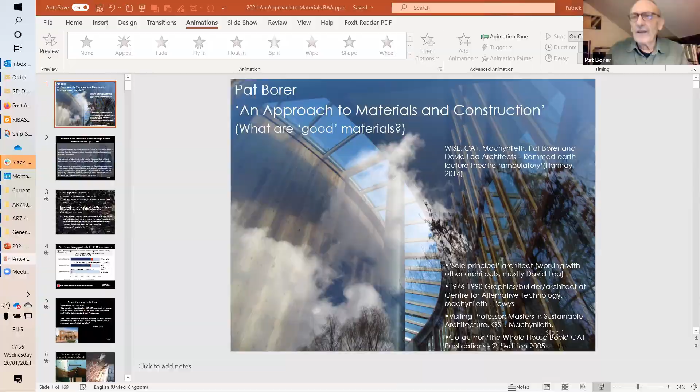Anyway, I will share my screen, which looks like that. Then I go F5 and hopefully - no, it doesn't work. Okay, right. Come on, yeah, there we go. I'm just going to get rid of all the zoomy stuff which gets in the way. You are screen sharing, I know. Yep, I am, I can see it clearly. How do you get rid of that? Anyway, okay, so...

Matt, the flyer said all materials are bad - I feel it's more a Matt phrase than a Pat phrase. So I've politely called it an approach to materials and construction.

Now what we like to do as architects is something like this - that is loads of light, space, commodity, lovely materials that we like the look of and the smell of sometimes. This is what we love doing. Now, interestingly, since this opened 10 years ago, I've done none of it.

And that's partly because nobody's asked me. Oddly, nobody wanted a rammed earth university. I thought they would pile in, but no. But the reason partly is...

Since then I've been working on this side of things really. And this learned paper from Nature, as you can scan around that, shows that our human-made mass is now bigger than the overall living biomass. So it brings you to the question of, well, two things perhaps.

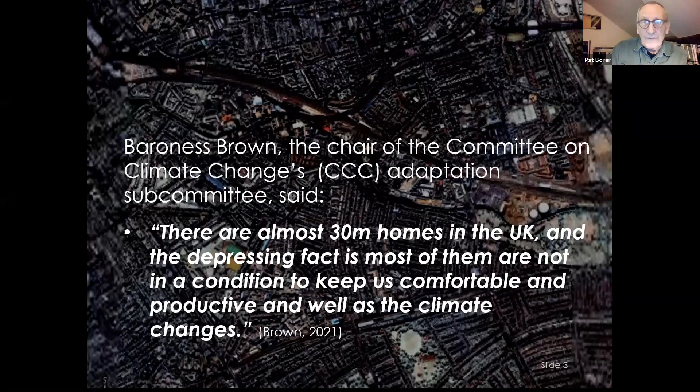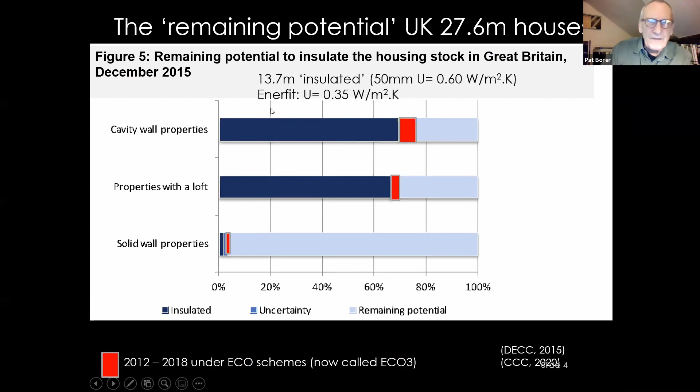So on that theme, the marvelous Baroness Brown, who I must come up and talk to, part of the Committee on Climate Change, says this: most of our houses are terrible. If you look at what we think remains to be insulated, the standards to which they think they're insulated are really poor. The definition of insulated cavity walls is about U value 0.6, and the Passive House ENERPHIT standard is 0.35, which seems more reasonable. So there's all that to do, same with roofs, same with solid walls, really.

So there's a heck of a lot to do. Not only that, the new buildings we've done, housing and non-domestic, I would say are pretty substandard. They need upgrading, as Baroness Brown says. I love this - Help to Buy should only be available if the homes are really high quality, because they're not.

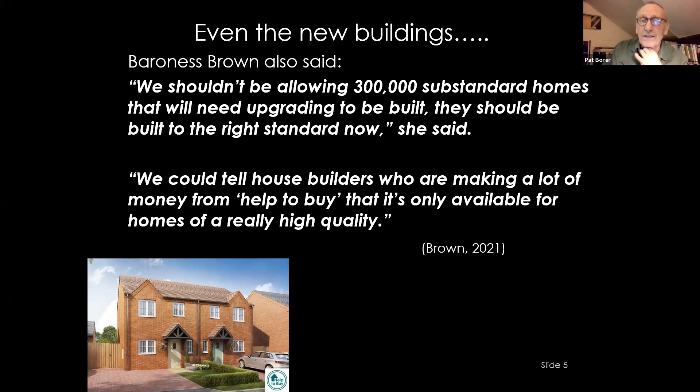So one of my hobbies is to break onto building sites and photograph terrible things that go on. These are local buildings to me - you don't need much breaking in because it's in the country. But you can see here, incredible material like Dow Chemicals Wallmate with nice tongue and groove on it, and they don't know what to do on the corners.

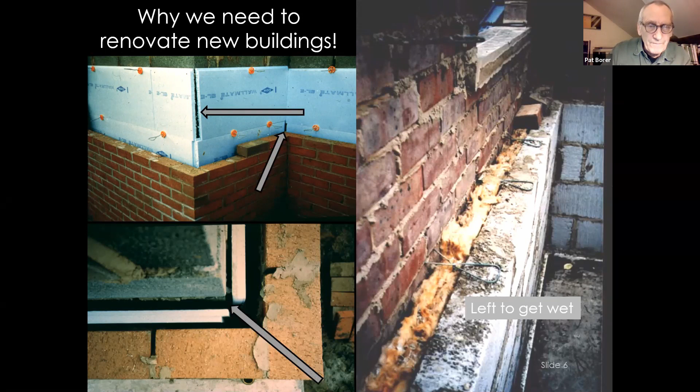This one is just down the road from me, Executive Housing, and it's appalling. Partial cavity fill, extreme thermal bypass, as it's called in Passive House circles - so you may as well not have bothered. Not only that, it's actually dangerous because water can be tracked across the cavity into the building. That's partly the materials, partly really poor specification and really poor site control.

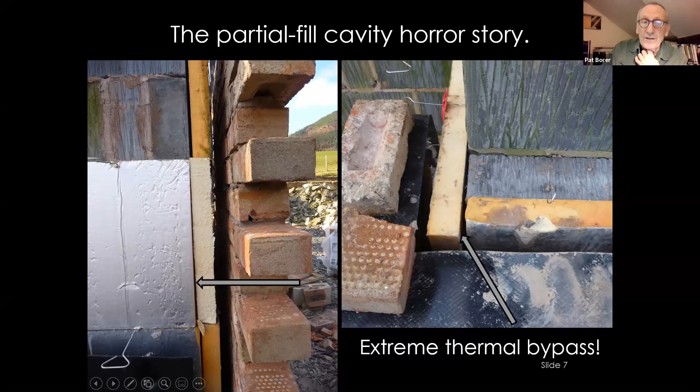It's really bad - lots of poor workmanship, poor specification. One of these is one of my sites, the one on the left. This is the second time they did it. I got them to take it down a third time and do it properly.

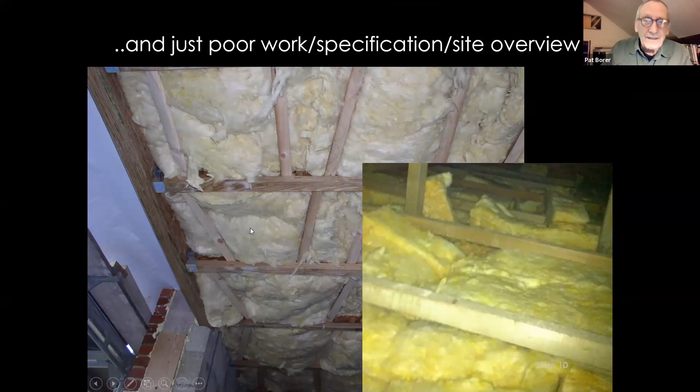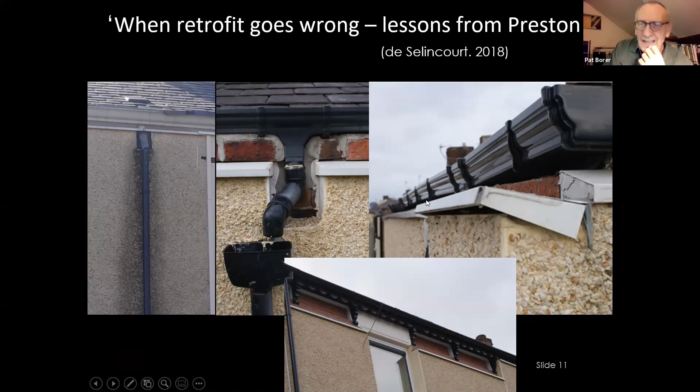And retrofit can also go wrong. This terrible report from Kate de Selincourt in Preston shows what's happening - this is external insulation, which should be good, shouldn't it? Best thing you can probably do to a brick house, but you can see how badly it's been done. Huge thermal bridges here, these cappings going the wrong way, which has ended up with the houses looking like this. So that's what's happening.

Now, onto materials. Some of this actually has nothing to do with the environment really, this is just good building.

And just using the wrong materials, or using materials badly, I suppose. This alarming picture is from Fraunhofer, who brought you Passive House and WUFI and things, and shows what happens. The most common way of insulating an old building is to stick foam-backed plasterboard onto the walls, and if that's done badly, and the material itself kind of asks for problems, you get mold. We shouldn't have mold in houses, or any buildings.

That's a bad thing, and what you've got to do is design it so that you don't get mold. That's partly the way you build it. If it was airtight, it would be better, but it's probably not. This may leave a gap between the board and the wall, which is bad, but also the material itself matters.

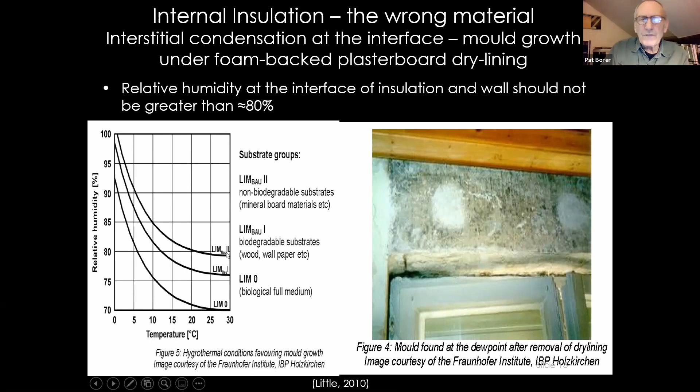This work done by Joseph Little, who's an ex-CAT MSc student 10 years ago, was quite an eye-opener for me. He looked at this in Dublin, so quite a wettish area, at 3 different constructions and what you could do. He analyzed it in WUFI, which looks at condensation, or what's happening to the wall over a period - in this case, 3 years - and it gets wet, then dries out, gets wet, then dries out.

Traditional buildings work like this - a traditional brick wall gets wet, dries out, because you've got fires going and lots of ventilation and so on. Very uncomfortable, but if you insulate it, that doesn't happen. If you insulate it with, in this case, phenolic foam, you're stopping it drying out into the house.

He did lots of different materials, but this is probably the best one he did - a calcium silicate foam. With slightly different U-values, you can see that because it's a breathable mineral foam, it dries out in the summer and then gets wet again in the winter, and on average it's less than 80% in the rendered blockwork, unlike the old brickwork.

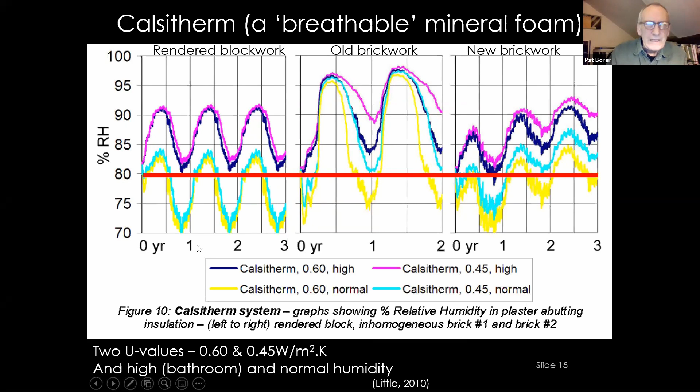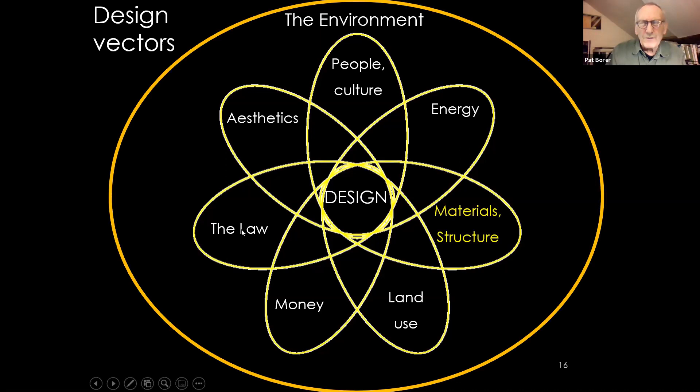So as I think it said in the flyer, design is a Venn diagram, and we're looking at materials, but it's also linked to all those other things, and we have also the environment as a general thing we're looking at. So how do you decide about materials?

Just take a sip, hold on.

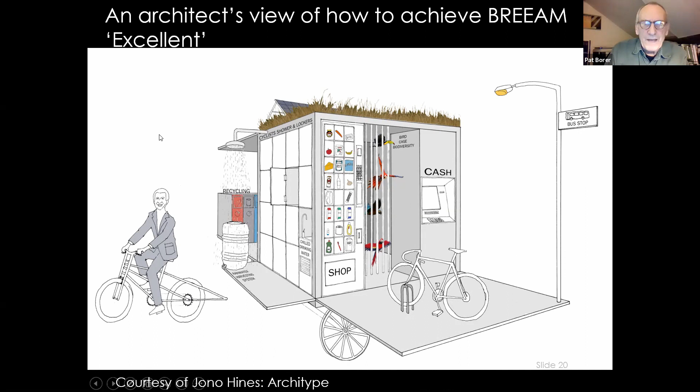I just thought I'd let you into this, which is Jono Hines, who's Architype's CEO, did this little cartoon of how to achieve BREEAM Excellent. So here he is cycling up with this trailer - it's kind of a cynical look at it, but he's done enough of these to know that if you've got all these bits and pieces, biodiversity, cash machine, good street lighting, a bus stop and all that, you've got a much better chance of getting it. If you haven't, then it's difficult.

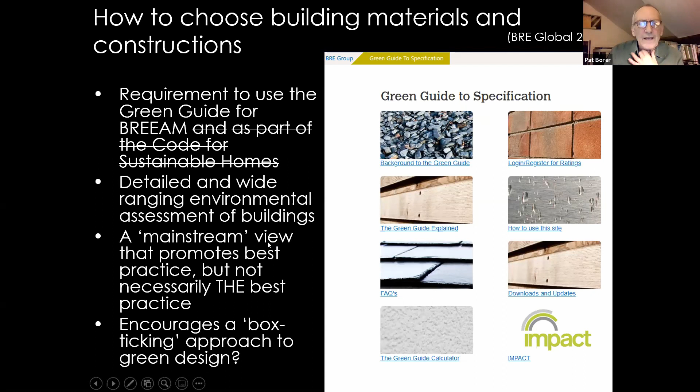Anyway, going on to materials, BREEAM uses the Green Guide to Specification - again, a huge amount of work, tremendous detail. You could say it's like, I suppose, a mainstream view that promotes best practice, but not necessarily the best practice, maybe. Perhaps it encourages box-ticking, I don't know.

So when I look at it, and people like me, I look up straw bale and it says A - hooray, that sounds good, and they've looked at all this incredibly detailed stuff. It's also got something I disagree with, that it's a minus number for kilograms carbon dioxide.

Why I disagree with it is that many of my buildings are made of timber and straw and all that stuff, which means I can end up with a negative number overall, which means it was better to build it than not build it. And that is obviously crazy. So I don't think you should allow for the sequestration of carbon in the building - it gives a false view.

However, straw bale is rated A, good. And what's it made from? It's made from sunlight, carbon dioxide and water. Depending on the type of straw, it'll have different inputs in terms of fertilizers - some, like miscanthus, none at all.

Then you look at expanded polystyrene, it's rated A+. Is that a sustainable thing? No, because this comes from oil, which is a rather fraught industry, quite destructive socially and environmentally. The oil really should be left in the ground - I think everybody's kind of agreed. So how can that be rated so well? Maybe somebody can explain, but on a very simple level, I look at these things and think, that can't be right.

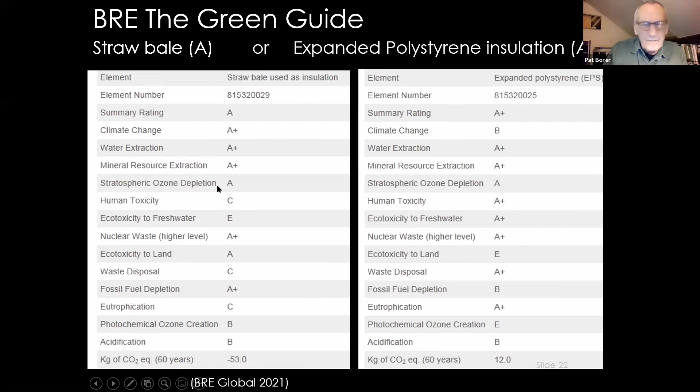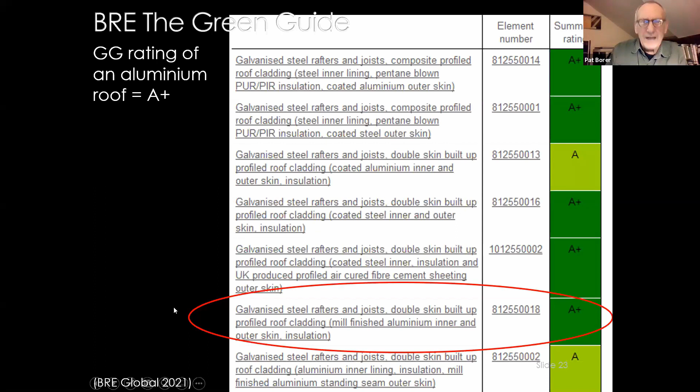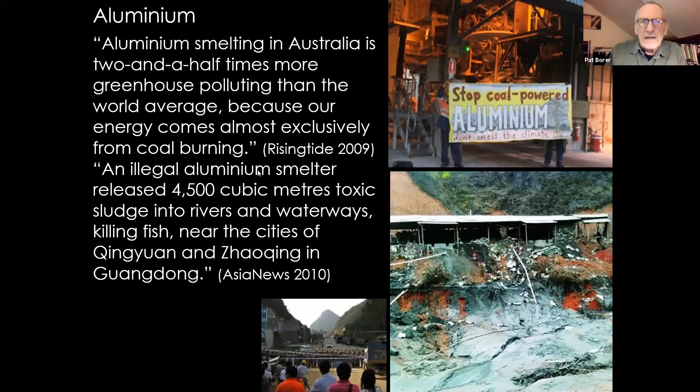This is just a couple of quotes from stuff that's going on - this is a lake near a bauxite extraction. It's a rather pretty colour, but I wouldn't swim in there. I wouldn't live here either, wherever it was - this spillage of waste from an aluminium factory. So we know it's got problems, so we know we've got to use it minimally.

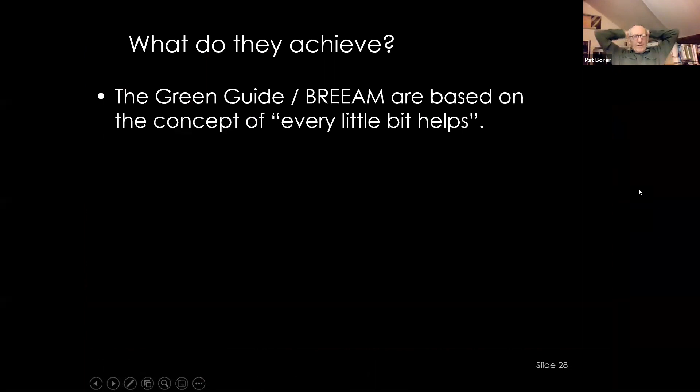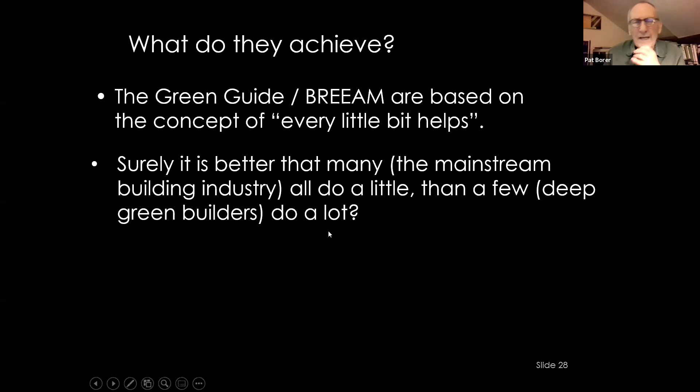So what do these achieve? It's based on the concept that every little bit helps, which sounds reasonable - a bit of recycling here and there. Surely it's much better that lots of people do a tiny bit than a few hippies like me, ex-hippies sorry, do a lot. But David MacKay, who unfortunately died quite young - he was the brilliant advisor to the Department of Energy and Climate Change and wrote Sustainable Energy Without the Hot Air - says if everyone does a little, we'll achieve only a little. His point is we've gone past the point where everybody's got to do a little; everybody's got to do a lot because we're in crisis.

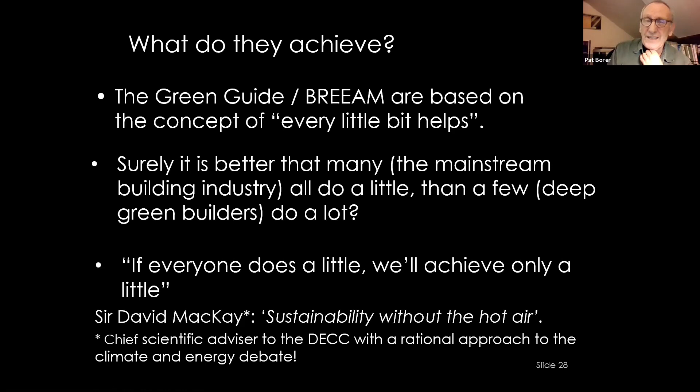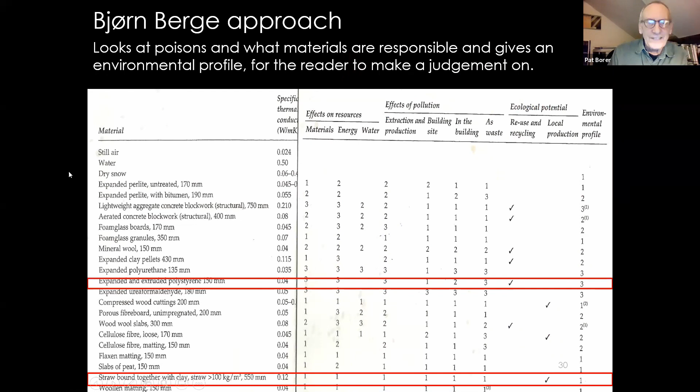So I kind of agree with it. You've got to choose who you agree with, really - there's no one answer, you have to make your own decisions. I'm not going to tell you what to do, though there's lots of people who want to tell you what to do.

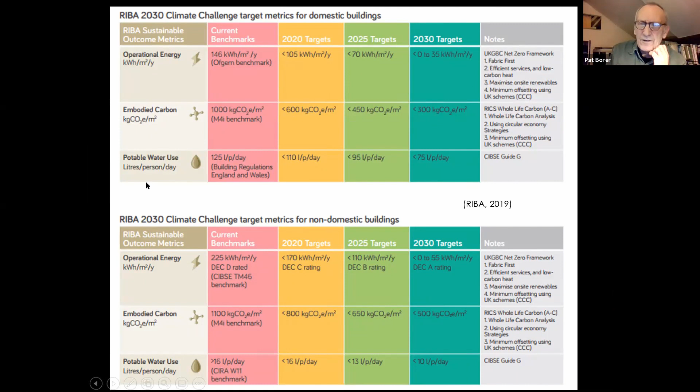There's also loads of stuff from the EU, which is a thing we used to belong to - 140,000 difficult chemicals, these are alien things that we've introduced to the planet, which is rather irresponsible of us. So they're analysing which are most carcinogenic and so on.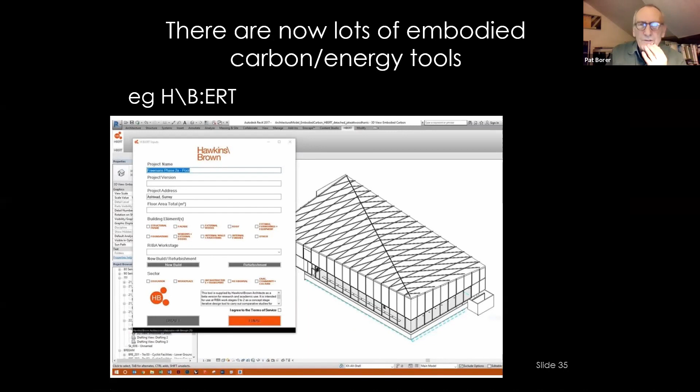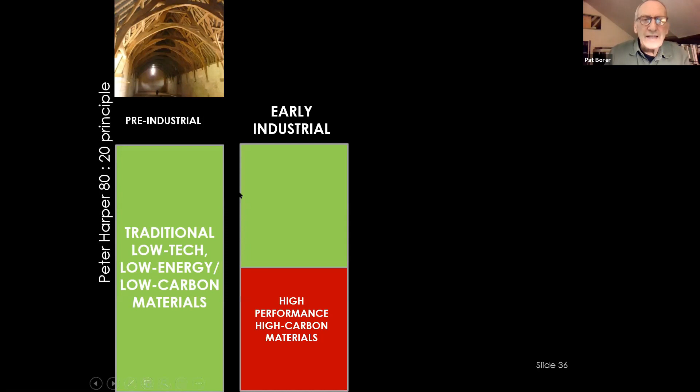So how do we end up at CAT? Well, Peter Harper at CAT gave this idea, which I quite like. It is very broad brush, but that in pre-industrial times, calling everything low impact, it had to be made of stones and lime and wood. And then as time went on in the Industrial Revolution, we brought in some high performance materials such as glass and iron and bricks and so on.

So to make wonderful buildings like this and artist studios in Goldhawk Road, wonderful things. Anyway, but now, certainly for non-domestic buildings, most of the materials, if you look at them,

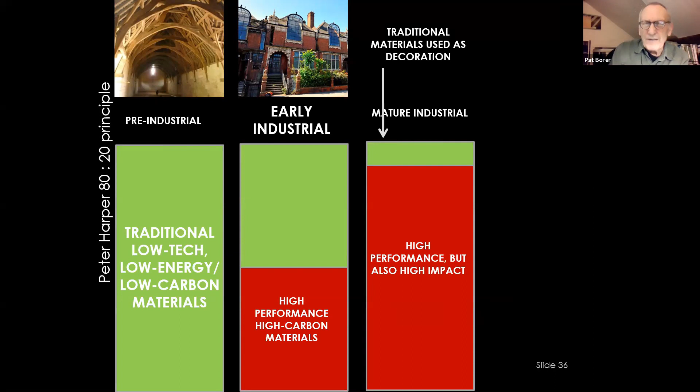are pretty high performance, good, but very high impact. And traditional materials, if we can call them that, are used as decoration. So this building in Cardiff, I can't remember what it's called, Millennium something or other, next to the Senedd. If you pop round the back into the car park, you see it's made of steel with a sort of wallpaper of slate, ridiculously, I think, put on the front. I mean, that's not how slate should be used, is it? But anyway, as decoration to show it's in Wales.

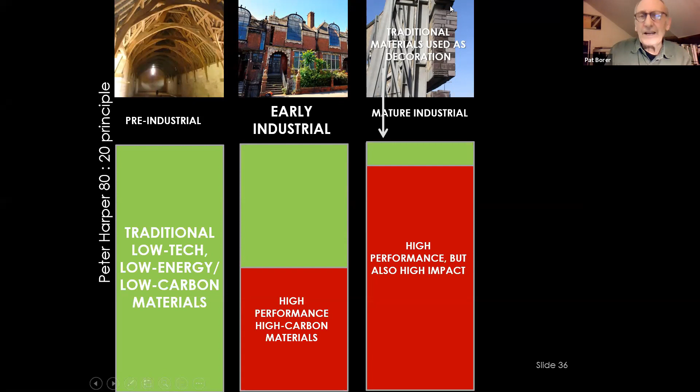And that's what most of them are like. Now, what we try and do is to reverse that as much as we can. And, you know, we say 80-20, no idea if that's right. I think the Wise building is probably about 90-10, actually, if you look at it in weight, because rammed earth is jolly heavy.

But we reduce - building is not that hard, is it? So you can use a low carbon material to provide most of the bulk. You're just trying to keep the rain out and the heat in, and provide pleasant places for people to live or work. And then, but to make it really good and to give us the internet and lighting and heating and so on, we need some what we call industrial vitamins.

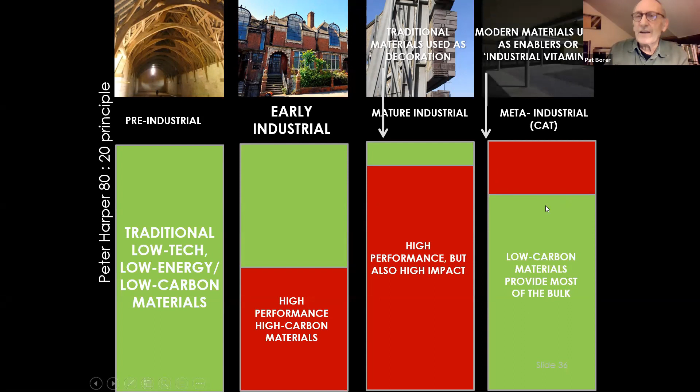So we're not throwing away the whole industrial approach. We're not going back to living in caves. We take the best of what there is and the lowest impact of what there is and use it minimally to give us the most comfortable, convenient buildings - that's what we try and do.

Right, sounds fair enough, but what are these low carbon materials and what are industrial vitamins? Well, I've just given examples of industrial vitamins. It's pretty obvious - I'm sitting here in front of my laptop with a nice lamp and so on. Those are my industrial vitamins at the moment. I've got a heat pump warming my house up, all that, PVs.

So what are the low carbon materials? And it's difficult because glass is high carbon, obviously, fantastic material, it's long-lived, and we can get energy from the sun from it, mostly through daylighting and also through passive solar gain. So where do you put that?

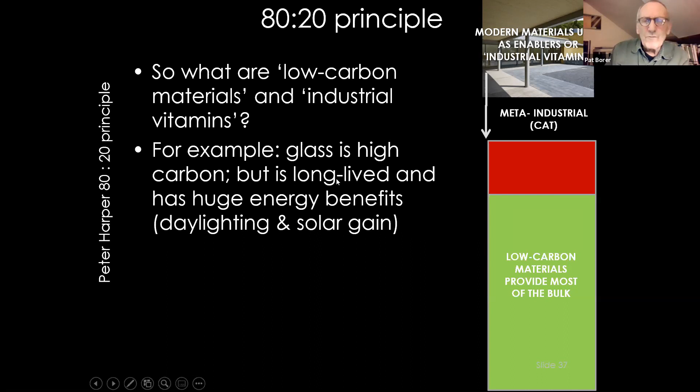Well, I'd put it somewhere in the middle. So this is my range. So it's not black and white, is what I'm trying to say, or green and red. It's a graded thing that you have to make up your mind where things go.

It seems kind of obvious that the lowest impact materials are those, like I said, with the stone wall - you just move something that's there to somewhere that's more convenient for you. And on the whole, that's very low impact. Can be quite high if you dig a lot of earth up, but we'll say that's low impact. And then the next might be an organic material that's grown by the sun and uses carbon dioxide and water to make it - so that sounds good. A mono material, that is, it's on its own.

You can reuse it again, take it to bits, and so on. And then there are composites, not quite as good because it's very difficult to separate out the hemp from the lime. I've tried it. They're both reasonable low impact materials. Plywood, using a glue, OSB, sheep's wool has got stuff in it, insulation to stop it rotting and so on. So these are composite materials.

And then you're on to rather difficult areas. Lime is probably better than cement, but it's not that good. And then calcium silicate and perlite, probably in the same sort of category. Bricks, as I said, lots of energy goes into bricks, but they're fantastic things. They last for hundreds, thousands of years if you use them properly with a nice soft lime mortar, so you can reuse them. So where does that go?

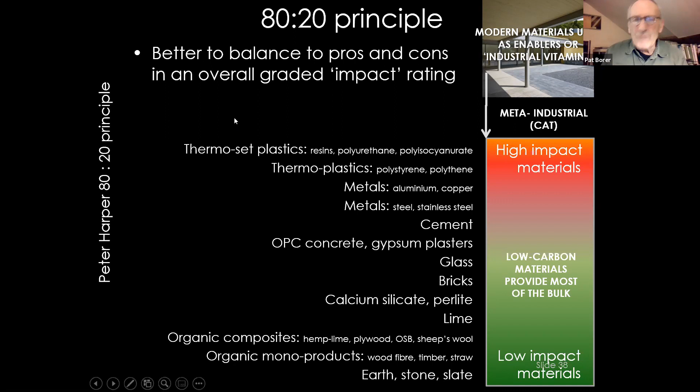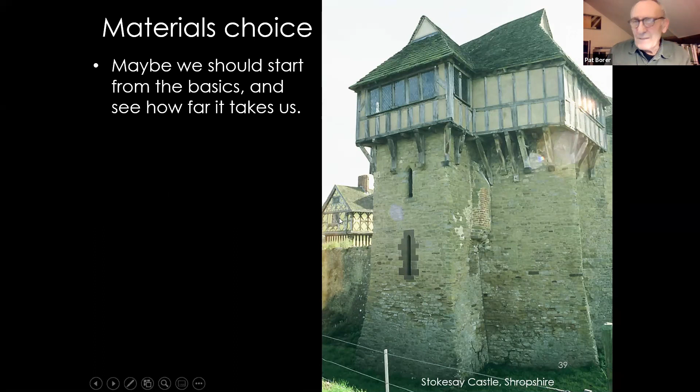You can go that far, and then you have that preference for those, and then this minimal chemical intervention. So lime, which they probably did use in this, glass, as you can see, bricks, and then the other things to make life more comfortable. And of course, the sort of passive house thing, fabric first for comfort, then minimal essential servicing.

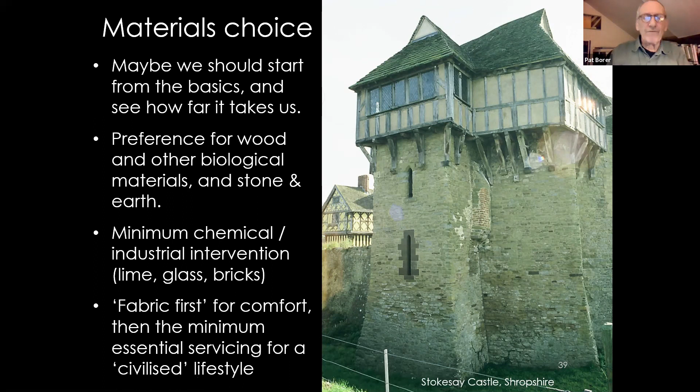So you might look at these things: local production, low embodied carbon, non-toxic, avoiding petrochemicals wherever possible, reusing things, minimizing waste, design for deconstruction, the last one is kind of a bit architectural, using real materials, and you know what I mean, that have a vernacular familiarity.

So we've grown up over millennia with things like wood and stone. We like them, so use them. And we don't like plastics particularly, or metally things. We haven't got a familiarity with them.

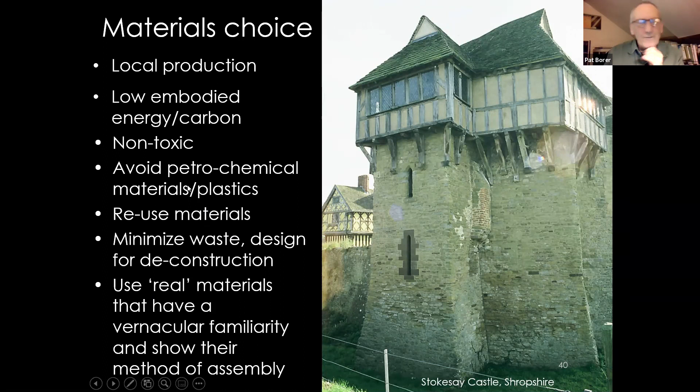And show how things are built, because most non-domestic buildings, there's an external skin of something, there's an internal skin, you have no idea what it's made of. And I think that's rather a failure in the architectural profession, that we no longer show how we build buildings. But that's just a thing that me and David have got.

So you can make your choices. Thermal insulation, obviously to the left, lower conductivity, better lambda values. And you'll see if you look down, most things are roughly the same, because it's air is the insulator, and air has a certain conductivity.

If you want to get better than that, you put in another gas. Used to be CFCs, now pentane and things, which has got half the conductivity of air. So you get these better materials, insulating materials down here.

And then I've ranked them in my own way, from more to less benign. I would start with organic, renewable and inorganic materials, but you can't always use them. You've got a cavity brick wall, you can't use sheep's wool, but you could use cork. That's a waterproof, fabulous material, and so on.

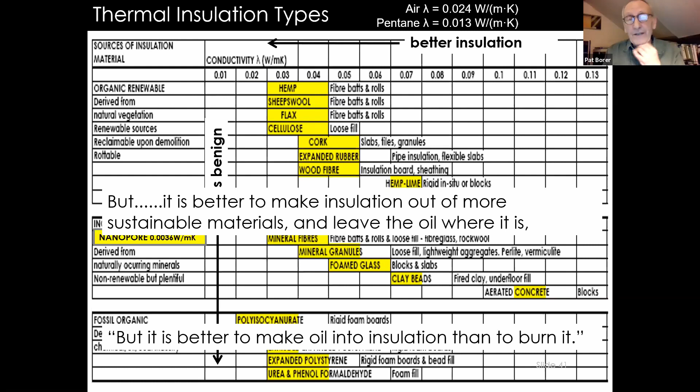You would hear people who make foam say it's better to make oil into insulation than to burn it. I would come back by saying it's better to make insulation out of sustainable materials, and leave the oil where it is, preferably, sequestering carbon. We do need to reduce plastics use.

And I couldn't resist, it's a bit glib, but to talk about Grenfell, because it's appalling. It was so shocking, I was shocked. Personally, I think we should have an embargo on these two firms. Don't buy anything from them ever again, because they've failed.

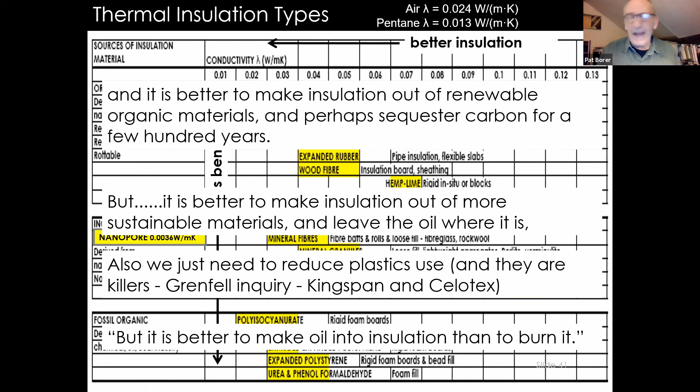Anyway, if you use these other insulation materials, of course it's all going to get fatter, isn't it? Because the thickness of the wall will increase maybe by 1.5 times. But perhaps they're going to get fatter anyway because of passive house and so on.

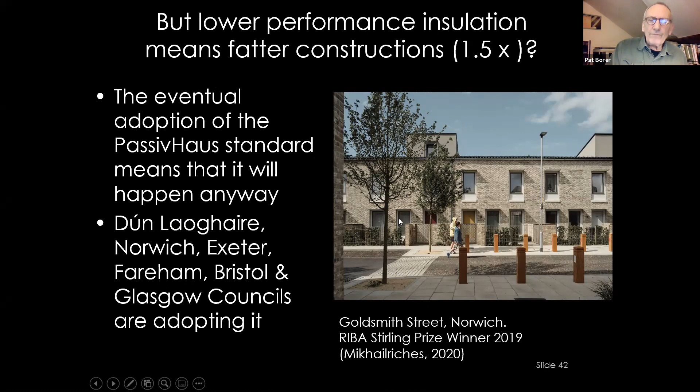So the second and last bit of this is to look at the WISE building, which we finished 10 years ago, and is like a mini university really, at CAT, where we have lots of mostly MSc courses, including MArch Part 2 architecture, public courses, and so on.

How am I doing? Oh, I'm there. You're doing well, you're doing well, don't worry. Am I? Keep going. Okay, I don't know when I started, so I don't know where I'm going to end.

So we've continued the palette that we have been building up: timber, homegrown timber, limecrete, and so on. Tried to get good insulation, which we mostly did. It could never be a passive house because of its form factor, it's much too extended, because we like it like that. And the windows as good as we could get at the time when we had ordered them 15 years ago. But we failed miserably because the windows are not very well made, in terms of our air permeability.

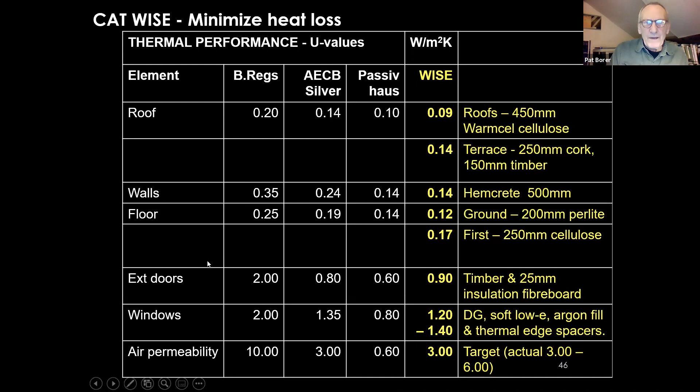Every room should have a view. Doesn't sound unreasonable. So that makes for rather extended buildings, single loaded bedrooms, for example, rather than the usual motel thing of bedrooms either side of a dark horrid corridor. So every space should be as lovely as you can make it, really. That means views out.

So that gives a pretty poor form factor, but it's pretty good insulation anyway. It's made of hemp lime, which was the experimental bit, we hadn't done that before. We had done rammed earth before, but CAT suggested they wanted a round lecture theatre, which we thought was a bit crazy, but they are. And the rammed earth has been successful.

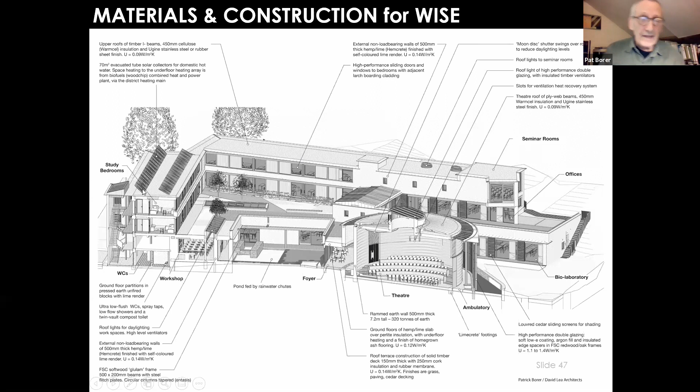We did it again. So started from the bottom, hydraulic lime concrete. That's a lower impact concrete that has an initial set, but eventually carbonates to get strong enough. We didn't need much in the way of foundations because we're on bedrock here, and other places slate waste.

Where you weren't on that, this is a slate tip at its natural angle of repose. So the least impact way was actually to do some ordinary Portland cement reinforced concrete rakers that are fixed to the bedrock at the bottom, and it's like a ladder leaning on the slate tip, and then build the timber frame off that. There are other ways of doing it, but this was actually the least troublesome.

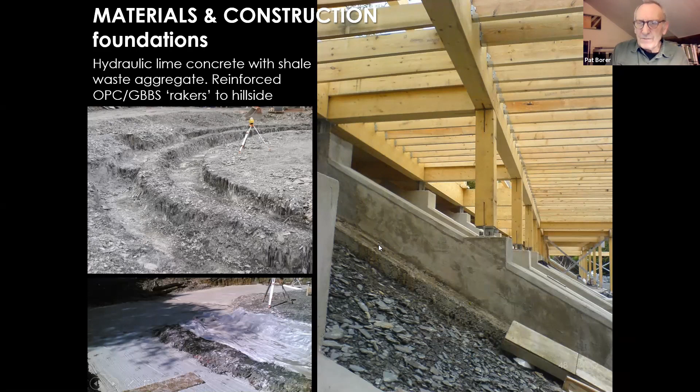So we got retaining walls, which we did in the traditional Victorian way. Rather than reinforced concrete, it's a masonry gravity structure that gets thicker at the bottom, made of low impact material called sand lime bricks, which are still available, autoclaved sand and lime, pretty good. They're ugly as sin, but they're good things. Laid in lime mortar, so in 1,000 years when this gets knocked down, you can reclaim the bricks.

Big cavities for a plinth wall, 300mm of perlite insulation poured into there. These are ribs, what we call them, diaphragm wall, to make it more stiff, with cork to reduce the thermal bridging. Same around cork to reduce the thermal bridging from the rammed earth wall, which is here. So this is limecrete in that same cavity, because we're going to ram on top of it, so it's going to be very strong. This is the shuttering for the rammed earth wall.

Where it's seen, then we use slate waste, which is good, from a local quarry. Not this quarry, we haven't got much slate waste. You actually have to buy it, which is rather odd, but fantastic material, wonderful stuff.

And then a lot of timber, and obviously if you preferably use homegrown timber if possible, and by that you're improving the environment as well, because to grow good timber you have to thin it. So this isn't blanket forestry like you find all over Wales and Scotland. This has been thinned for these larch trees, but it could be Douglas fir, all sorts of things. And you can see how this is now like a Scandinavian type habitat with pine martens and so on.

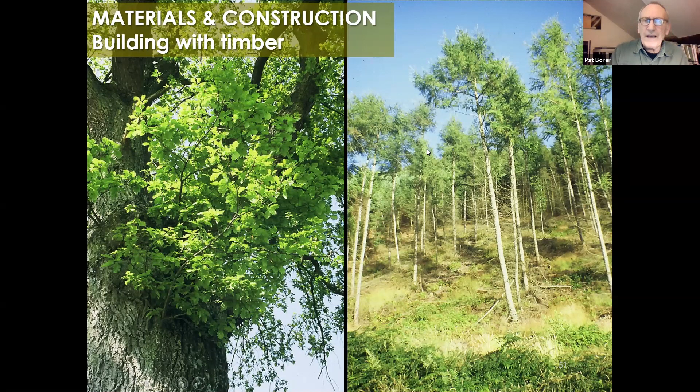Oak is the best, but we haven't got much of that. So this ended up being actually whitewood, which wasn't particularly what we wanted, but that's the way these jobs go. So it's glulam, and you can see here bits of metal, minimal flitch plates to join the things together in a very strong way that keeps him, the Buro Happold engineer, happy, and is also very buildable.

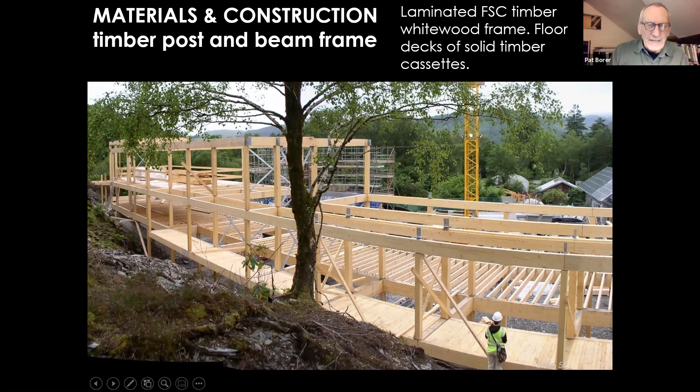So this is whitewood, but FSC. Everything is FSC, which is the most important thing, rather than homegrown. That's slightly important. So it's a big frame with normal joists and then timber cassettes, as you can say, solid timber, which you'll see in a minute.

Some of the columns are round, so we took the advantage to do this wonderful thing called entasis, to taper them to the top, which was no trouble for the glulam manufacturer, costs very little, and it just makes them a bit more elegant. And then these decks of solid timber cassettes.

Nowadays this is called Brettstapel, and it's pegged together with wooden pegs. At the time that hadn't been invented, or we didn't know about it anyway. So this is screwed together, but it's the same thing. And you can span enormous distances. So this is rather like a concrete deck, but it's made of timber, solid timber, which also adds to the insulation. Because we like to see how it's made, you can actually see it in the building.

These are slots for services, because we haven't got suspended ceilings. We don't like them generally, which makes life really difficult, but it's possible. Otherwise, just joists as normal. So they can span huge distance. This is 6 meters span with 150 deep timber.

So there's a lot of sequestration going on here, 14 kilometers of this, so it can nearly reach to Aberystwyth. And they are slotted into the frames.

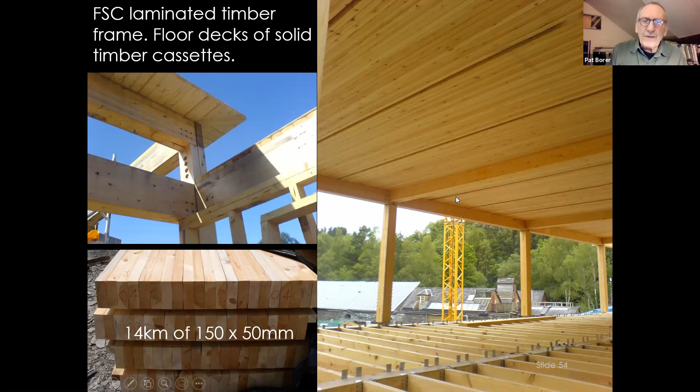On top of that deck, because it's a roof terrace, we've got 250 mil of cork, and this fantastic material cork does grow on trees, and well, they've recently done that slightly iffy but interesting all-cork house, which is, I think, a very brave thing to do.

But it is a wonderful material. It's waterproof, similar conductivity to ordinary expanded polystyrene, grows on trees, squash it together, makes this load-bearing material, fairly load-bearing. You can walk on it or cast a slab on it. Brilliant stuff. So we use a lot of that.

And the wine industry has turned away from cork. It's now screw tops and plastic. So it needs supporting, the cork industry, otherwise we're going to lose it.

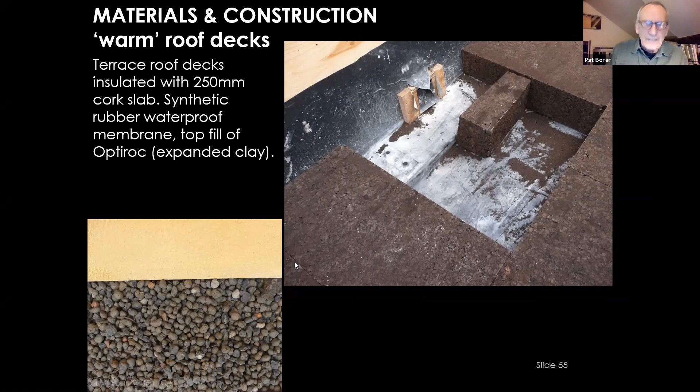So for those who like details, there's the deck. This particular one has got an angle fixing it to the glulam beam, which is here. And then on top of that is butyl rubber, 250 mil cork, then EPDM, and then we'll have a roof finishes. And this is next door in the bedroom.

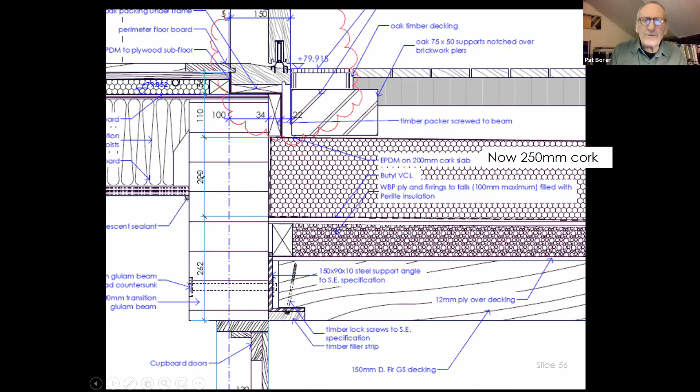And then pitch roofs, fairly conventional really. These are ventilated pitch roofs with 450mm deep timber I-beams, full of Warmcel, which in my view is the best insulation ever made, because it fills every little gap and performs much better than it should. Plus it's made from recycled newsprint, and it's cheap, very cheap, cheaper than anything else if you use enough of it. I recently did a costing to prove it was 3/4 of the cost of doing the same U value in a foam whose name we shan't mention. So it's cheap, but it's brilliant. It's obviously not a foam, so it's thicker, but 450mm is in here. That does the job. Also, of course, I-beams will span enormous distances.

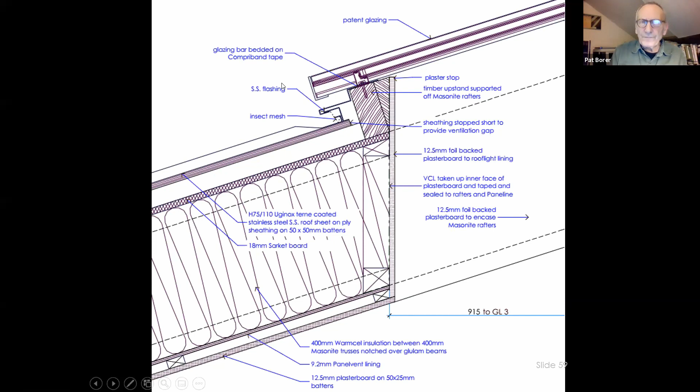So there's a bit. Walls - we experimented for quite a long time with different wall constructions. As humans, we've been doing it for millennia and we still don't really know. But we were rather fed up with doing the multi-layered timber frame, which works terribly well, but has 10 layers which all have got to be perfect. We rather liked to get back to just one solid material, like concrete, but made of nice materials, or straw bale - a mono material. That's a kind of architectural thing that we just like, that feeling of having one material that did everything - kept us warm, kept the rain out, and was strong enough to hold up some shelves.

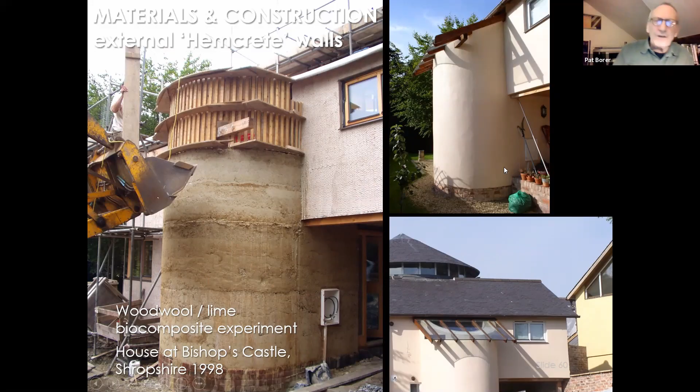These are some experiments I did with woodwool lime, but we ended up using hemp lime, which is just coming in, thanks to Ralph Carpenter in East Anglia and so on, and this firm, Hemcrete, who made a commercial go of it. I think it's brilliant - you could make it out of a better crop than hemp, probably miscanthus is better. But anyway, hemp is what we used, which is a crop whose fibers are used for industrial purposes, like composites, plastic, BMW dashboards and things. But what's left is the hemp shiv with a lime-based binder. This one's got a bit of cement in it, so it goes off quickly-ish. It's monolithic, and it does all these things - it's got some thermal mass, half the insulating value but twice the thermal mass of sheep's wool or something else, and it's hygroscopic and breathable.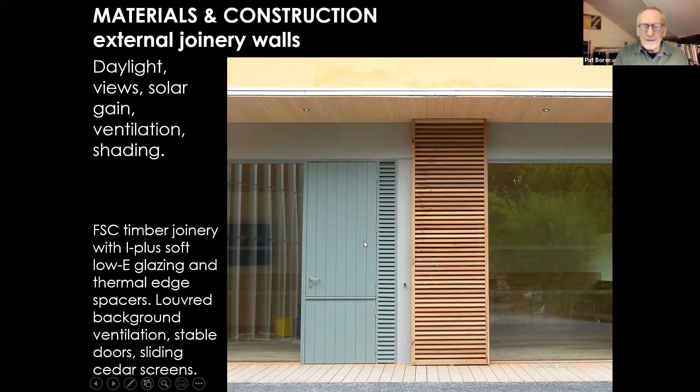Sliding screens for overheating. This was good FSC timber joinery, but it was really very poorly made, and it'd be lovely to get some much better joinery in there. This is where our airtightness didn't work really.

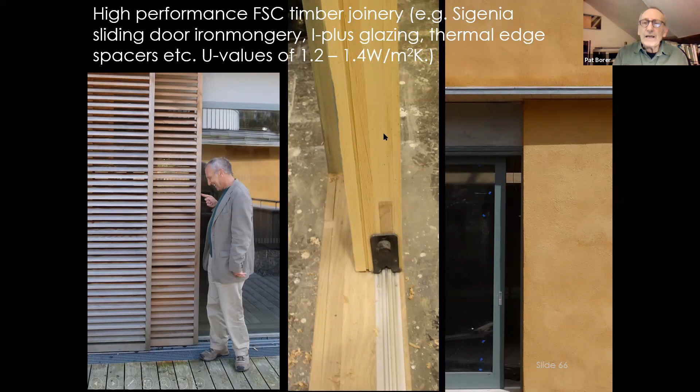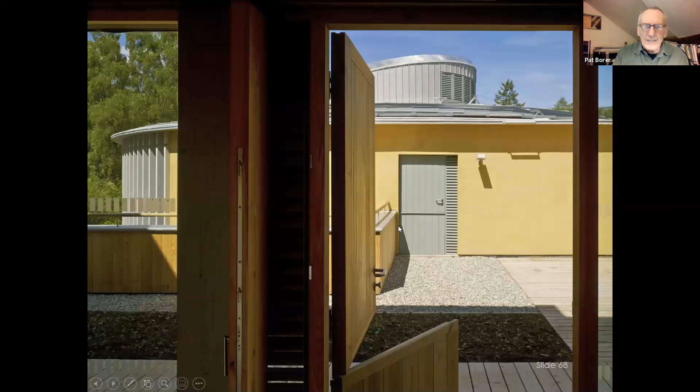There you go, timber frame walls. We did do some of the conventional timber frame walls where we wanted it a bit thinner so we could have the slider going in front of it in the bedrooms. This is what it looks like from an office. Don't do stable doors, they were terrible. But here's the louver thing.

You can just see a bit of light coming through there. That works very well, I think. This is my favourite wall, the galleries around the back, which stop overlooking of the cottages. We did this slatted screen, which I see lots of people do now, and I really like it. It gives a lovely space inside of semi-openness.

Ground floors didn't work so well. Here's that plinth wall, a retaining wall with the perlite insulation, hemp lime above it. At the time it was just going to be hemp lime, and then this is what we went for, which I think was not a good construction. It's got perlite, which the material itself is okay.

And then we were persuaded to do a hemp lime screed on top, which didn't really work very well. Well, it did work, but not where you want to put timber on top of it, because we wanted a timber finish. So this is Silencio Thermo, a fibre board with underfloor heating pipes and ash flooring. But it's got to be at a really good moisture content, otherwise the floor will go completely wrong. And hemp loves water, it's very hygroscopic, and we just couldn't get it to dry out. So in the end, we had to put a polythene sheet over and let it dry very slowly. But that was a mistake.

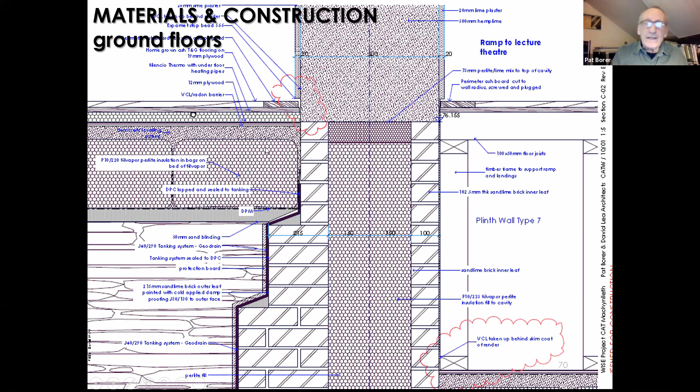But where we had tiled floors in the toilets, it worked brilliantly, because it could breathe through the pointing.

So here was the perlite insulation. And of course you forget, you buy all these lovely materials, hemp and sheep's wool and lime, and they all come in plastic bags. The earth didn't, obviously. Some material, wood didn't, but most of it comes in plastic bags, like food does in a supermarket. And that's a huge problem. Of course, I didn't really think of it at the time when we were specifying. Perlite, yeah, nice, it's just exfoliated rock. Brilliant.

So we left it in the bags because, as I said, not much of this gets recycled, so it's probably better to put it underground. It also acts as the DPC. Put it underground where it'll be for many hundreds of years, I hope. And then maybe by the time this gets done, we'll have found out how, or we will be recycling polythene, because we won't be making any more new polythene. So it's a sort of, I'm not very happy with it really, but it makes a lovely pattern, doesn't it?

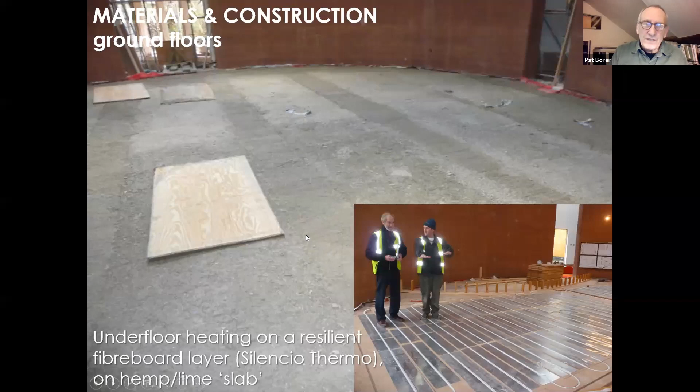And so on top of that went the hemp lime floor slab, which was not bad, but it should have been limecrete, ordinary lime concrete with underfloor heating pipes in it. Then we could have avoided the steel and aluminium heat spreaders in the underfloor heating, and it would have dried much quicker, as normal concrete does. We could run the heating through it to do that.

And then ready for this finish, which is absolutely fantastic, supplied by a local firm who know exactly what they're doing, fitted by carpenters who knew what they're doing, and it's beautiful. Just the right thing for CAT, because our waste, our dirt is white because it comes from slate waste, so a pale floor is what you want. So ash flooring, which is solid ash, not composite, is terrific. I'm really pleased with that.

Oh God, I've still got a bit to go. Yeah, it's not long, I'll speed up.

Unfired earth blocks, pretty good. Again, wrapped in plastic because they're not waterproof. So in a way that's quite reasonable, for all the ground floor partitions. Pretty good.

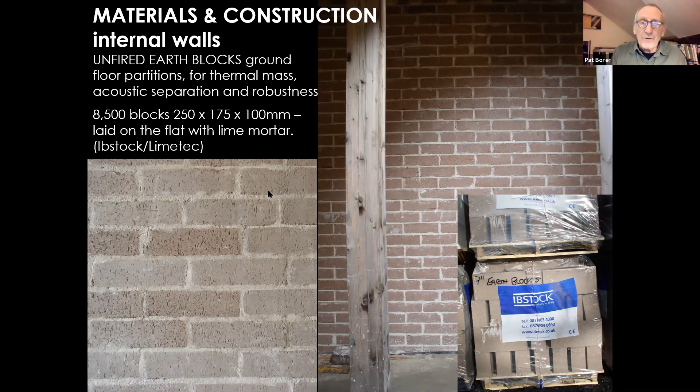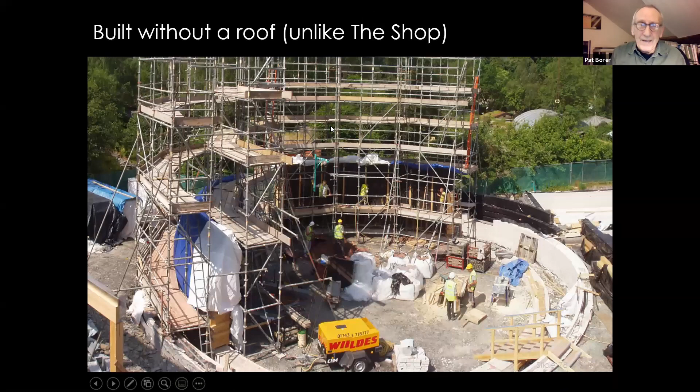But they didn't build a roof, which we wanted them to do, and I did drawings for how to do it, but they wanted to sheet it up every night, which was terrible. It took ages because you can't let any water get on this.

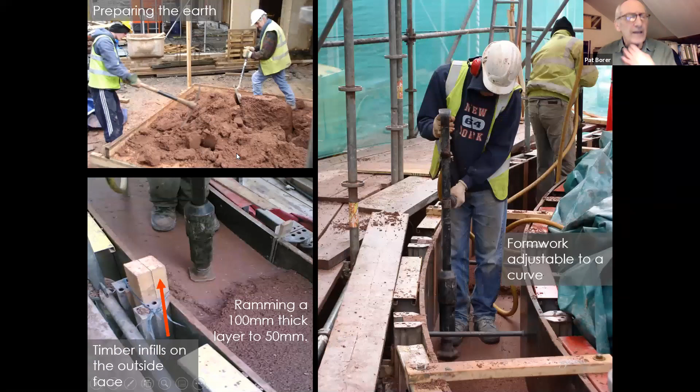And here it is, preparing the earth, which came from a local quarry as a waste or byproduct of a limestone quarry. It's called scalpings. It's very heavily tested in Bath for the right strength, and it's rammed from 100 mil down to 50 mil. And there's the formwork that they used.

Unfortunately, they tried to cut corners. I haven't got the pictures of that, some other time I'll show you all that. And it collapsed when they took the shuttering off, and they had to redo it because they started probably at 150 mil and rammed it to 100, so it wasn't nearly strong enough. So it wasted 6 months taking it to bits and doing it again.

Of course, you can use the same earth, and in fact that's what this is. This is a picture of some of the rammed earth wall being demolished and broken up to use it again. So that's quite nice, really. They were fairly annoyed, but when they did it the next time, it was really good.

50 mil, you can see the 50 mil lifts here. So it's 100 mil, rammed to 50 mil. On top of that, wall plate, lots of timber, lots of ply web trusses, which are amazing things.

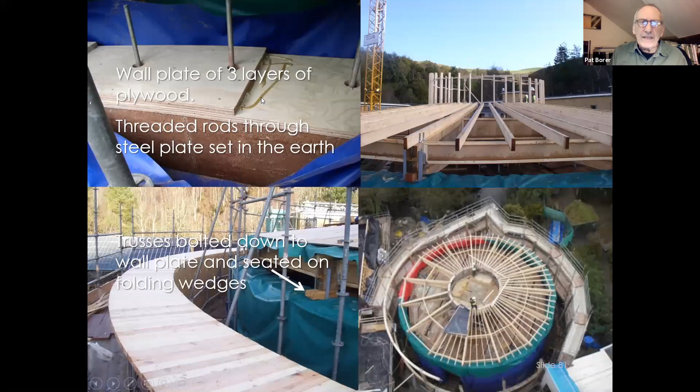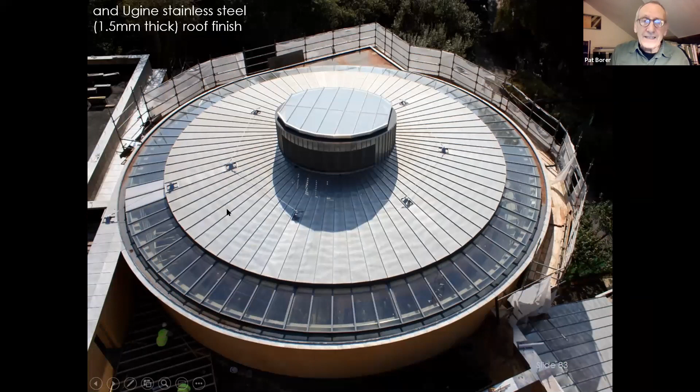And then this Ugine stainless steel, beautifully done by these people. Incredible workmanship, wonderful. I phoned them up in a panic and said, oh, I forgot to tell you, we wanted... and he said, I know what you're going to say. You want the seams to follow the glazing and then follow up the drum in the middle, don't you? Yes, of course you do. Oh God, why can't they all be like that?

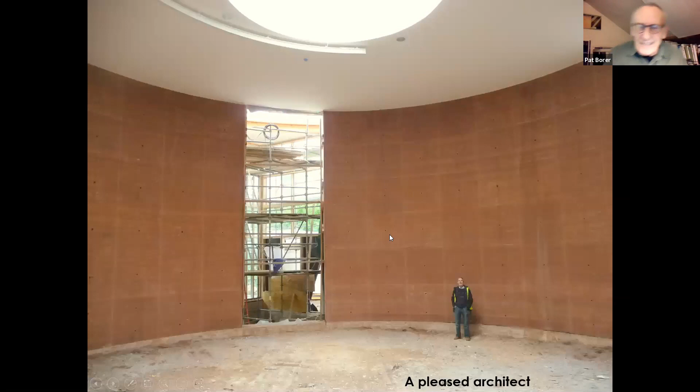So here's David, very pleased, rammed earth walls. We wanted it left like that, but we had to fit things and people and so on, which is a bit annoying, and a bit of acoustic stuff because circles are not great for lecture theatres, but we improved it enough with the sheep's wool and so on to get it reasonable.

So it's pretty lovely. And finishing on these 2 slides, because what I learned is all these materials are great, but you've got to have people who understand it. You've got to have the builders who take it on board.

And our first contractor, who we thought was quite good, coming from a history of conservation, didn't at all, or at least they got taken over by a crook. And the firm in the end went bust. We threw them off site. It was horrible, a terrible time.

But in the end, these people—this guy is a physicist and runs this small local firm with people he trusts, brilliant, skillful people who love steaming ash to make handrails to the right diameter. Fantastic, terrific care.

One of the carpenters said when I went on site, sorry Pat, I made a mistake. Oh God, what? He said, well the cork expansion strip, I should have had it running up the front of the stage, shouldn't I? And I forgot. And I said, okay, we'll let you off that one. But that was the care that went into it.

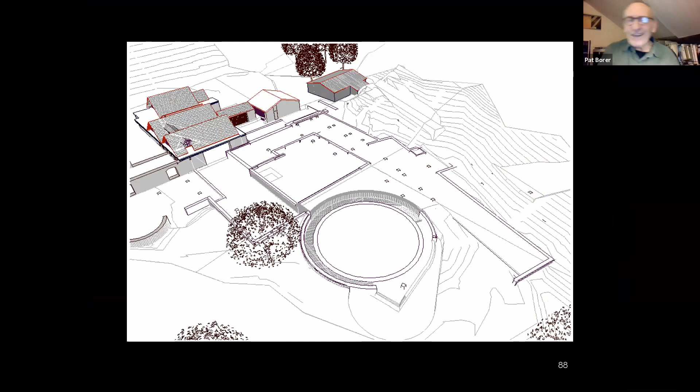Oh, here's how we built it. Foundations, frame, decks, more joists, masonry, rammed earth in no time at all. All that. Cover it in something, put some walls and a bit of colour. And that's the end. These were the people involved. We were lucky to get some awards, and there, like a good academic, is my references. Thank you.

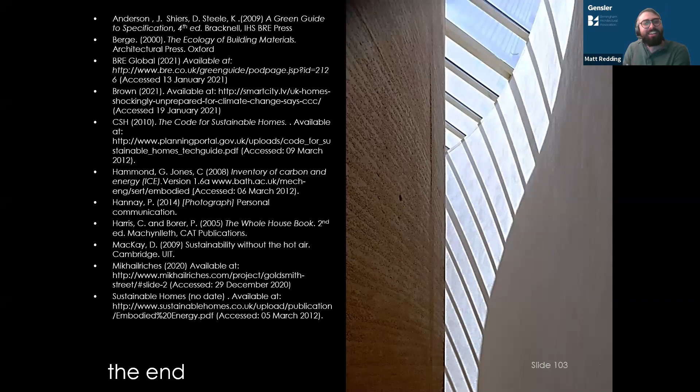Wow, Pat, just amazing, just absolutely amazing. Did I go over? Yes. No, don't worry. By the fact that there's only 10 people that have left, it shows how very interested this audience is in what you've got to say. They were all from Kingspan, were they? They left quite late on, so they must have taken a fair amount of punching if they did.